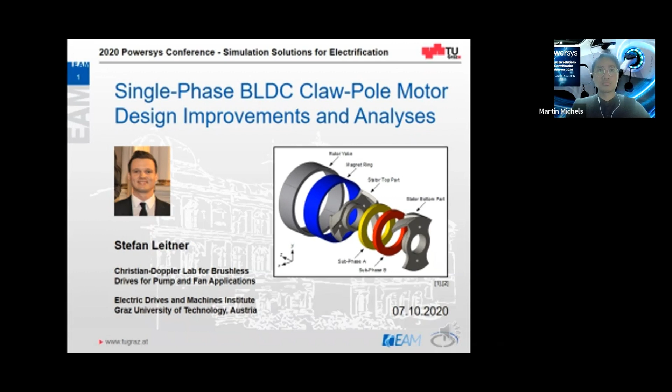One of the designs is actually shown here in this picture on the right. Well, I'm sure that at least some of you have already tried to slowly spin the shaft of a small PM motor by hand in the no-load condition. And what you feel is the cogging torque, which tries to restore the rotor to positions of minimum reluctance. Cogging torque can be a source of airborne and especially structure-borne noise in electric machines because, as it is superposed upon the alignment torque, it can trigger resonances of the drive system or adjacent structures. And today I will show you some interesting ways to reduce the cogging torque of small PM motors as opposed to conventional techniques with no increase to the manufacturing cost, which is super important for mass production.

So after a short introduction, I will walk you through 4 different brushless DC claw pole motor designs, namely air gap asymmetry, single-sided skew with auxiliary slots, and V-skew, which I will explain later in more detail. They have been investigated with JMAG and also verified by different experiments, notably with a rheometer shown on the right, to cope with the very small torques. Rheometers are typically used in the chemical industry to study the viscoelastic behavior of, for example, ketchup or toothpaste. Then I will explain the used rheometer-based measuring techniques.

I'm very sorry. It seems as the picture is not very clear. I will try to rerun the presentation. Just a minute. Yes, I think this is better.

Which are used to experimentally determine the cogging torque, the hysteresis torque, and the iron losses of the manufactured prototypes, as shown here. And lastly, I will conclude the main findings. Introduction.

Let's start with some background information. So when it comes to cars, there's two trends. Cars are becoming more and more quiet, especially when you think of electric vehicles, and the number of auxiliary drives is increasing, mostly for comfort and safety reasons. As a result, the noise of auxiliary drives is often unmasked, as shown in this picture, and can become disturbing. Hence, it is important to improve the noise behavior of these auxiliary drives. Currently, there's up to 100 small electric drives in a mid-size executive car, typical applications being illustrated in this picture. And one example I'm focusing on is the LED headlight fan for cooling and dehumidification.

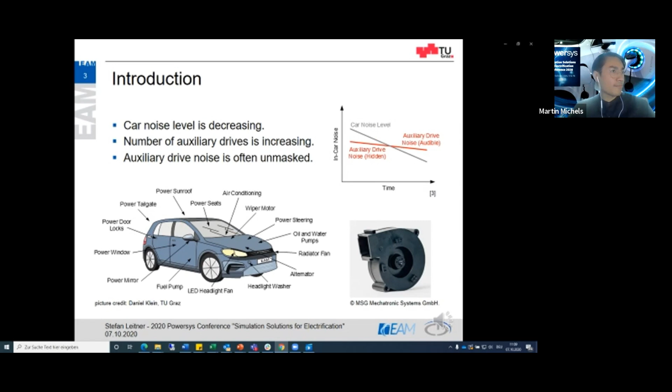So what's the motivation? Auxiliary drives are typically characterized by suboptimal motor behavior for cost reasons. That means they are often single-phase instead of three-phase systems, so they are characterized by fluctuating power and torque. And due to the very low number of stator slots, these motors typically have a very high cogging torque, which can be a source of airborne and especially structure-borne noise. But what is cogging torque actually? Put simply, cogging torque is a no-load torque caused by the permanent magnets on the rotor, which aim to align with the maximum amount of iron material, minimizing the reluctance.

So technically speaking, it occurs whenever magnetic co-energy changes with the rotor position. So the cogging torque is inherently offset-free. When the rotor is released from the shown position, the cogging torque will cause a counterclockwise rotation, trying to minimize the reluctance. A typical cogging torque waveform is shown in the picture on the right, with the cogging positions at 0, 90, 180 degrees, and so on.

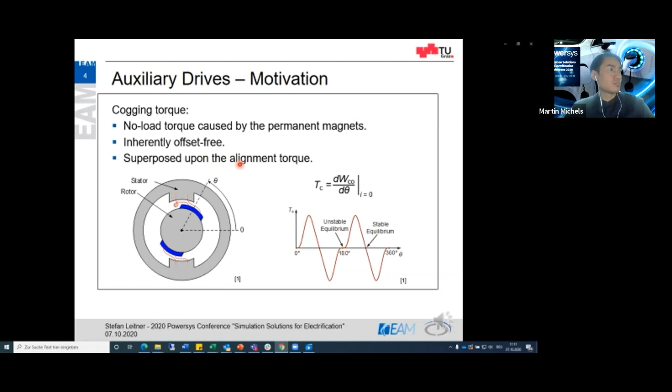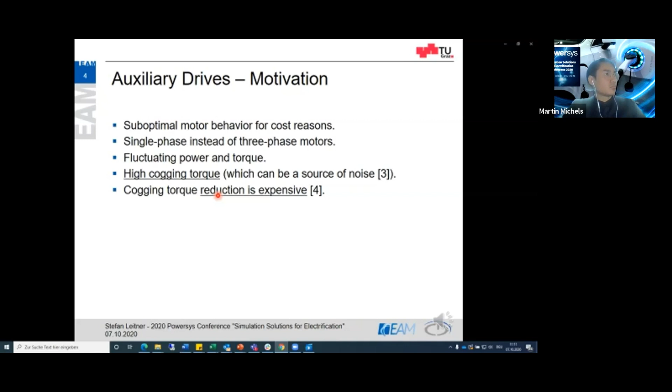But there are both stable and unstable points of equilibrium. And in the end, the cogging torque is always superposed upon the alignment torque, increasing the torque ripple. Unfortunately, cogging torque reduction is typically expensive as additional manufacturing steps are involved, which is often a disqualifier for mass production. So the target is to reduce the cogging torque with no increase to the manufacturing cost through proper design modifications. And even though it's hardly possible, it's still important to note that a complete cogging torque elimination in single-phase motors can be detrimental to the starting of the motor, but there are also different ways to deal with that.

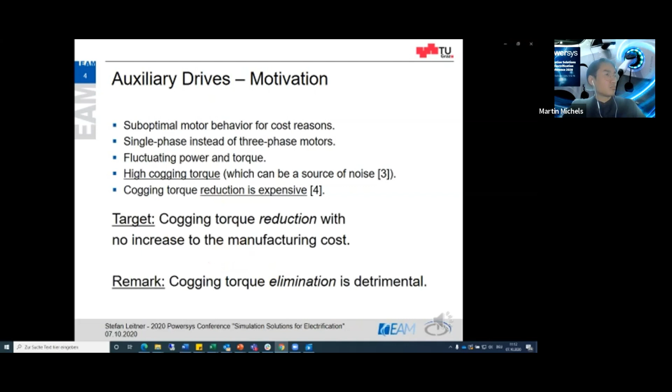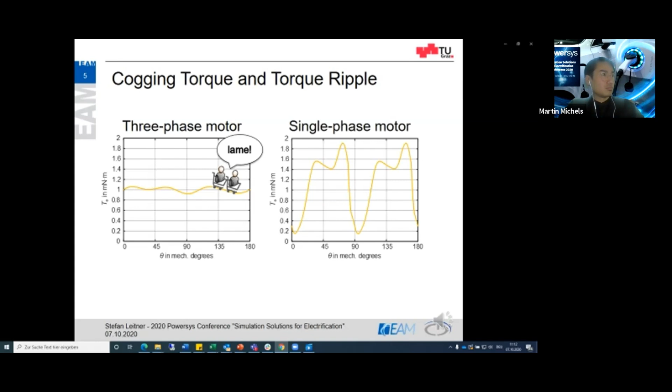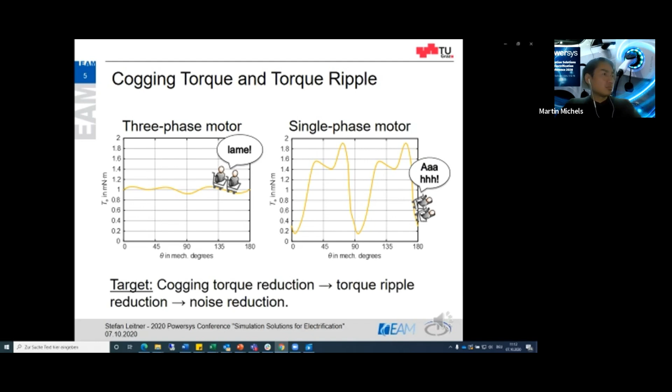On the other hand, single-phase machines are more like the crazy roller coaster in the amusement park of electric machines. Much more fun, but as you can see, they can sometimes be too noisy. And that's why my target is to mitigate the high harmonics of the roller coaster a little bit by reducing the cogging torque and torque ripple, and thereby potential noise. Let's move on with the studied motor topology.

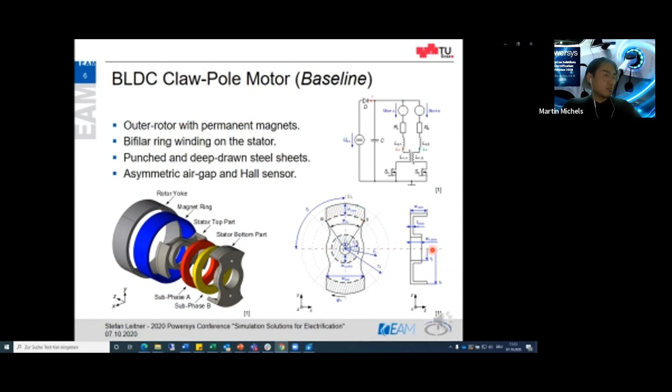Here we can see an exploded JMAG model of the baseline single-phase BLDC claw pole motor. It consists of an outer rotor with permanent magnets, actually a permanent magnet ring, and a bifilar ring winding housed between two specially shaped stator parts, which are punched and subsequently deep-drawn steel sheets. As the two sub-phases of the winding are wound simultaneously, they are very well coupled, as indicated in the electrical equivalent circuit on the right. An advantage is that in this case only two MOSFETs are necessary for phase current commutation, using the signal of one Hall sensor. And for startup, this motor can be implemented, for example, with an asymmetric air gap, the design of which will be discussed shortly.

Sorry, the video's not good anymore. I will do it again.

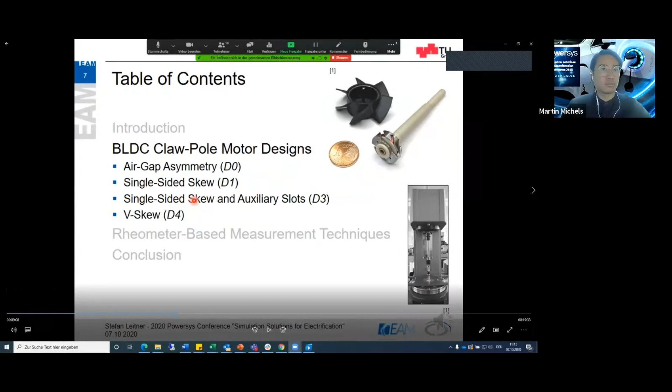So, different skewing measures. Design 4, with its V-skew, on the other hand, can reduce the cogging torque and at the same time balance the axial magnetic forces typically introduced by a single-sided skew. This effect is well known from skewed induction machines.

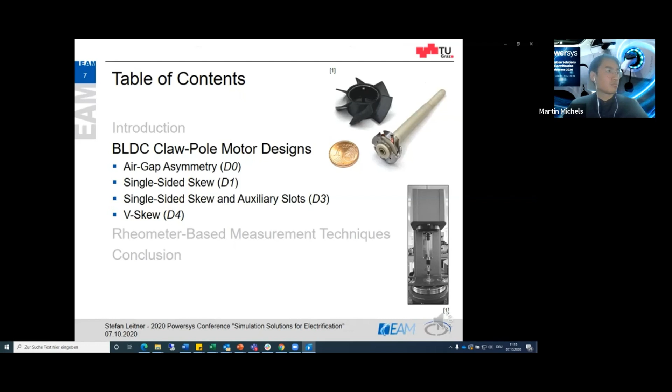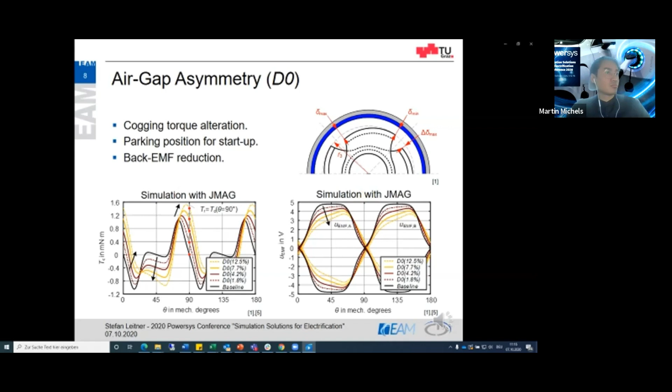However, increasing air gap asymmetry causes the effective air gap to increase as well, which causes the air gap flux density and, as a result, the back EMF to decrease. So from this point of view, the degree of asymmetry should be kept as low as possible.

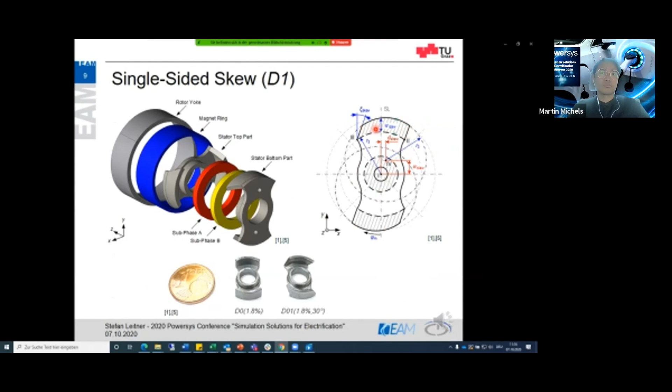Single-sided skew. So when you think of cogging torque reduction, what first comes to mind, of course, is skewing. But the big advantage of the claw pole motor topology is the fact that, thanks to the proposed punching layout, skewed stator claws can be implemented at the stage of punching the steel sheets at no increase to the manufacturing cost. So compared to conventional rotor or stator skewing, no additional manufacturing steps are necessary, which is a big plus. Now, implementing a skewing angle of 30 degrees can successfully reduce the...

Cogging torque is reduced by 23% in the simulations and by 28% in the measurements. As we will see on the next slide, a 30-degree skewing angle is chosen as a trade-off between maximum cogging torque reduction and minimum back EMF reduction. As can be seen, the simulation and measurement results agree

generally very well. One interesting aspect though is the circled plateau indicated in red. In the simulations, it appears at minus 0.2 millinewton meters, while in the measurements it is shifted down to about minus 0.4 millinewton meters. So it looks like the waveforms are simply offset. As discussed later on in the section about rheometer-based measurements, this can be attributed to the hysteresis torque phenomena, which was observed only in the measurements because a detailed hysteresis loop model was not available for the used iron materials.

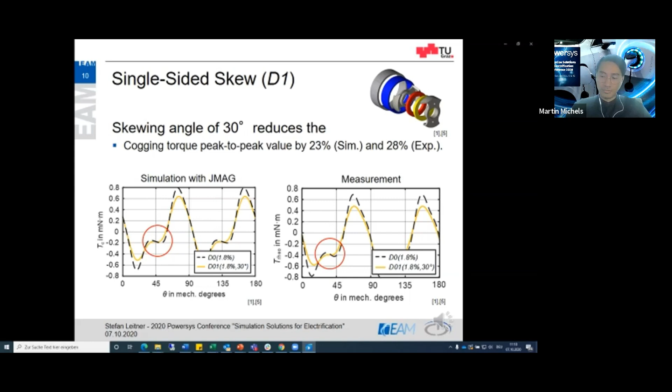So let's see what happens to the back EMF. The implemented single-sided skew of 30 degrees affects the back EMF only marginally. It is reduced by 1.7% in the simulations and by 1.9% in the experiments. As can be seen, the simulation and measurement results are in pretty good agreement.

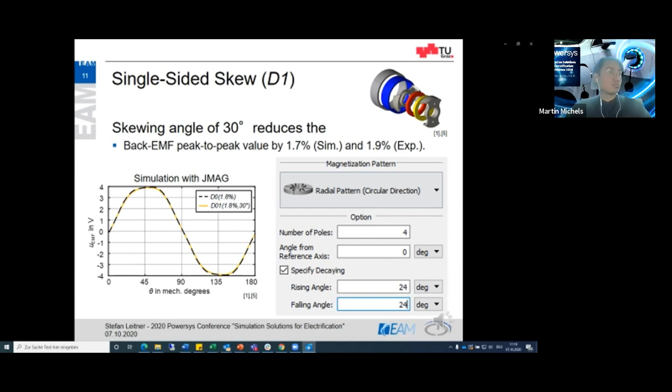At this point, I'd like to make a comment on the used JMAG settings. The ring magnet was modeled having a radial magnetization pattern with 4 poles. To consider the pole transition zone of the magnet, a decay was specified, as shown here, with rising and falling angles. So having performed the measurements, I had to play a little with this decay angle. In this rather simple modeling approach, the magnetization is assumed to be trapezoidal. But if you want to go for full accuracy, JMAG offers the use of customized magnetization patterns.

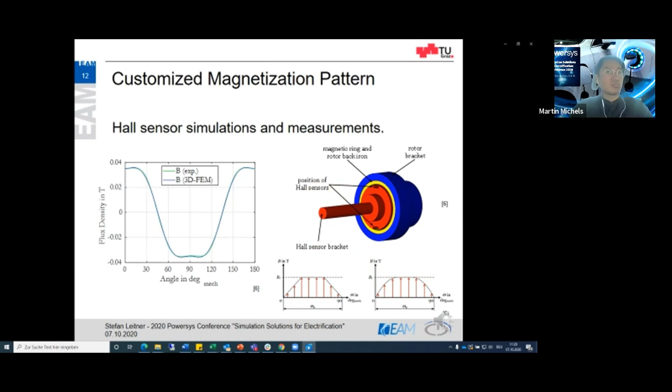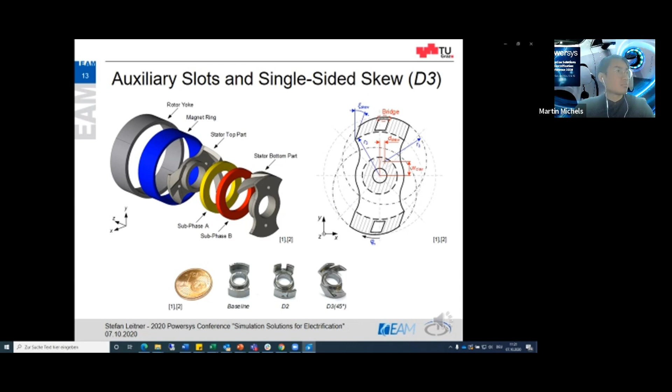Back to the different designs. In design 3, a single-sided skew is combined with auxiliary slots for cogging torque reduction. The introduction of auxiliary slots in design 2 can modulate the cogging torque, as discussed in more detail on the next slide, and thereby makes skewing much more effective in reducing the cogging torque. And again, this can be considered at the stage of punching basically for free. Let's take a closer look at how this works.

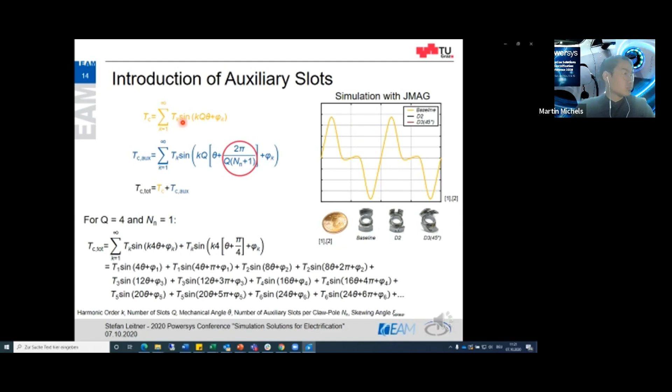Every cogging torque waveform can be described by a Fourier series without the zero component. Introducing auxiliary slots, an additional cogging torque waveform is created, which is phase shifted from the initial one. And these two are then superposed. For the 4 stator slots and 1 auxiliary slot per claw pole, this superposition looks like this. But as you can see here, if the auxiliary slots are identical with the actual slots, the odd order harmonic components cancel out due to a 180 degrees phase shift, while the even order harmonics add up. And the result is shown in the plot on the right, where the new cogging torque has double the frequency.

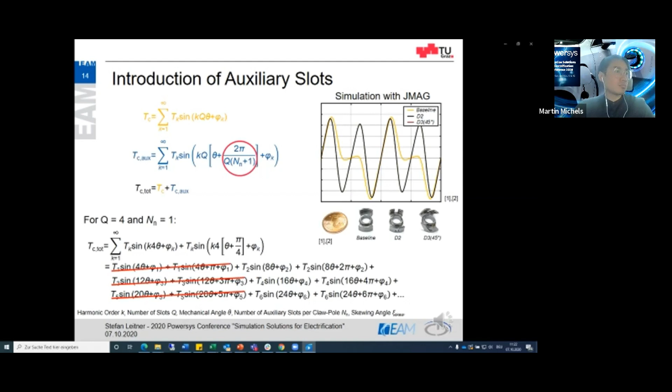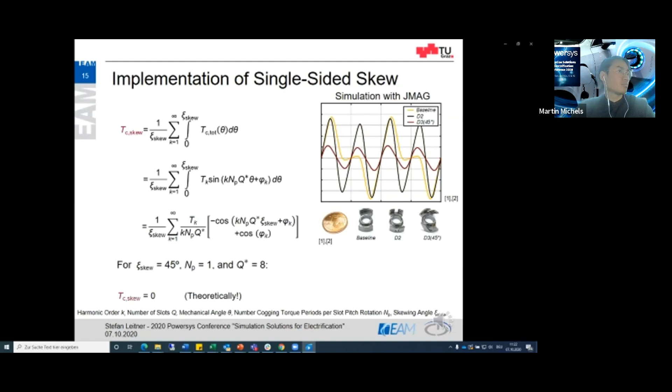Now, as a second step, a single-sided skew is applied to the stator claws, which acts as an averaging filter. Therefore, the black waveform can be described by a new Fourier series. And solving the integral yields this equation. And for a skewing angle of 45 degrees and a slot number of now 8, the cogging torque is theoretically 0. In the implemented model though, this is not really the case, but it's largely reduced, which we can discuss later on. But let's take a closer look at the analysis results.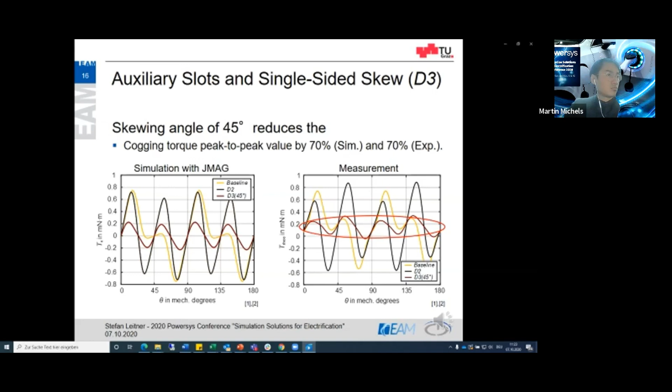So in the end, this cogging torque reduction results in a torque ripple reduction of 17%, as illustrated in the simulation results here of the output torque, comparing the yellow and the red waveforms. On the downside, in design 3, the back EMF is reduced by 12%, which eventually results in a reduction in the efficiency of 3 percentage points from 36% to 33%.

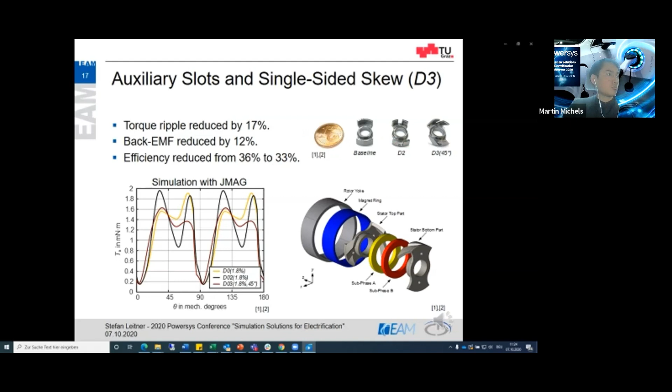In both cases, different input losses are dissipated in the winding, studying the steady state and transient overtemperatures of the winding for different ambient temperatures. From the steady state analysis, we can obtain the overall thermal resistance, and from the transient analysis, we can calculate the thermal capacitance based on the thermal time constant measured.

The determined equivalent thermal resistances are all around 40 Kelvin per watt. It can be concluded that the proposed cogging torque reduction measures do not cause excessive heating.

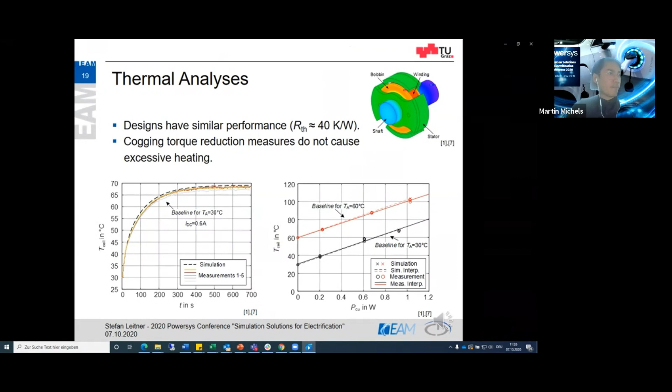Back to the motor designs. One disadvantage of the single-sided skew is the introduction of axial magnetic forces. As you can see from this equation, the axial forces are proportional to the tangential forces, and they in fact increase with increasing skewing angle. So for a skewing angle of 45 degrees, the axial forces are even equal to the tangential forces, because the tangent of 45 degrees is 1.

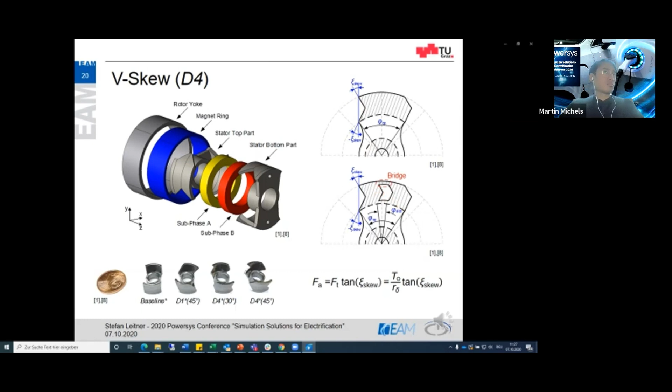In the end, the fluctuating output torque of this motor will cause fluctuating axial forces, which can also lead to noise. And to balance these axial forces and still reduce the cogging torque, the design 4 is implemented with a V-skew, where positive and negative skewing angles are realized halfway through the axial length of the motor. Again, all can be included in the punching layout. And if necessary, you can also include some auxiliary slots of the same shape.

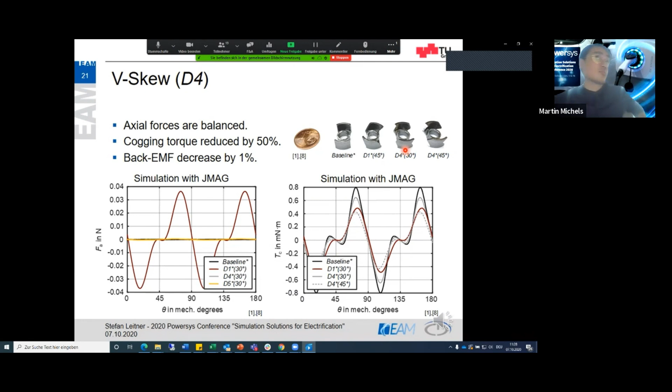This slide shows selected analysis results of design 4 with the V-skew in the no-load condition. Axial forces on the left and cogging torque on the right. Let's take a look at the axial forces first. Compared to the baseline, shown in black, the single-sided skew in design 1 introduces axial forces, as shown with the red waveform. But owing to the V-skew in design 4, these axial forces are balanced again.

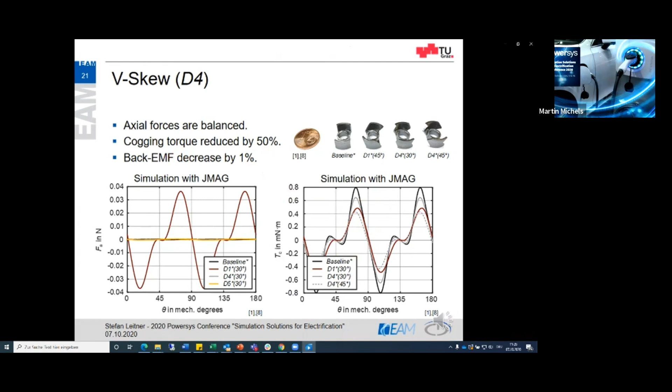On the right, we can see the cogging torque of these designs, and most importantly, for a V-skew of 45 degrees, see the dashed gray line, the cogging torque of the baseline in black can be successfully reduced by 50%, while the back EMF is only marginally reduced by 1%.

Rheometer-based measuring techniques. Measuring torques in the sub-millinewton meter range is challenging because especially friction can significantly affect the results. That is why I used a rheometer to determine the cogging torque, the hysteresis torque, and the iron losses of these small motors.

The test setup is shown on the left, in which a clamping element attaches the rotor cup to the rotating shaft of the rheometer, and the stator is mounted onto the stationary lower part. For the measurements, the rotor is pulled over the stator and then rotated by the rheometer, measuring the torque necessary to perform the rotation. The general motion equation of this setup is depicted below, including the torque components to be expected, namely acceleration torque, the torque measured by the rheometer, friction torque, cogging torque, hysteresis torque, and eddy current torque.

And by setting a constant rotational speed, the first term vanishes. And since the rheometer features radial and axial air bearings, and since there's no connection between the rotor and the stator, the friction term can be neglected as well. Performing the measurements at very low speed, for example 1 RPM, eddy current effects can be neglected as well. And this leaves us with this equation, which shows that the measured torque under these conditions is a superposition of the cogging torque and the hysteresis torque.

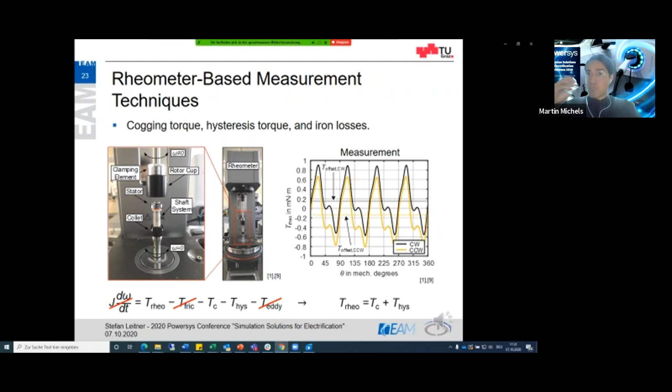And here we can see the no-load torque waveforms measured in the clockwise, black, and counterclockwise, yellow directions. Since the cogging torque is inherently offset-free, as we learned earlier, the observed offset is attributed to the hysteresis torque. So next I will show you how to separate them. Based on the previously determined torque waveforms for the clockwise and counterclockwise directions, the cogging torque shown in yellow can be determined by calculating pointwise the arithmetic average.

Similarly, the hysteresis torque can be determined by subtraction, according to this equation. It is shown in red for both measuring directions in the plot. As can be seen, the hysteresis torque is far from being constant. In fact, it strongly depends on the rotor position, and this is caused by the stator slots.

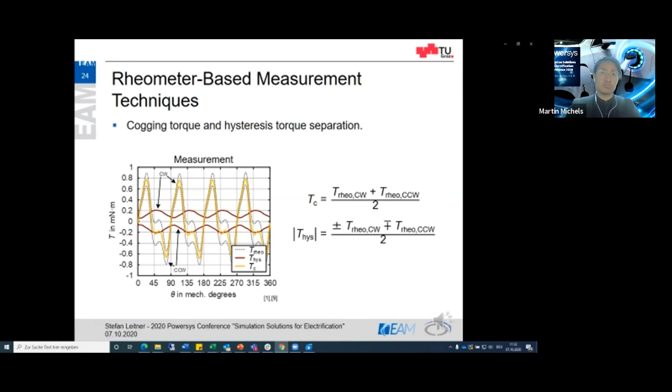The average hysteresis torque of this claw-pole motor is higher than a comparable brushless DC motor with a lamination stack, because the claw-pole motor is made from cheaper iron material with a relatively large hysteresis area. For comparison, the measured cogging torque is contrasted with the simulated cogging torque, showing excellent agreement. Now we see that the plateaus of the two waveforms actually match.

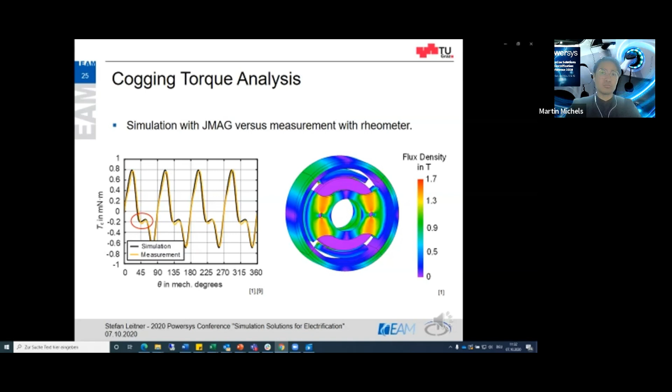So we've seen in the previous slides that there's an offset in the measured torque waveform, which is attributed to the hysteresis torque. Now, performing measurements at elevated speeds, it is observed that this offset increases linearly with increasing speed. But as the hysteresis torque is essentially speed invariant, this increase is solely due to eddy current effects. And by multiplying the measured offset torque by the angular frequency, the iron losses can be obtained and also separated, as shown on the right.

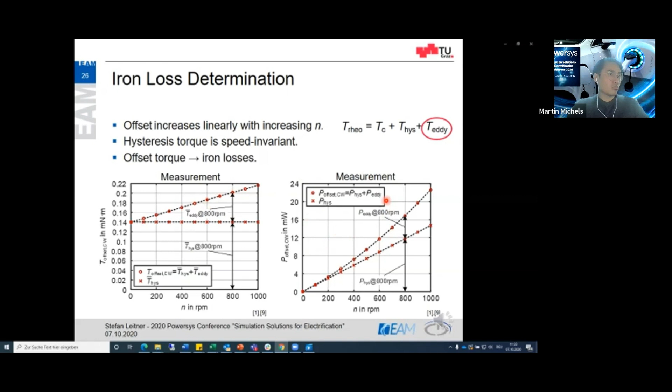An advantage is the fact that, as opposed to the investigation of sheet material properties, all manufacturing influences which typically alter the iron losses significantly are included in the measurements, as the assembled motor is studied. That brings me to the end of this presentation.

So I've mentioned that single-phase BLDC motors are characterized by high cogging torque and torque ripple, the harmonics of which can trigger system resonances and cause airborne or structure-borne noise. But unfortunately, cogging torque reduction is typically costly, so it involves additional manufacturing steps, which is often a disqualifier for mass production. However, in the proposed BLDC claw-pole motor designs, the cogging torque can be reduced and the axial forces can be balanced, both at no increase to the manufacturing cost, as the improvements can be considered at the stage of punching the steel sheets.

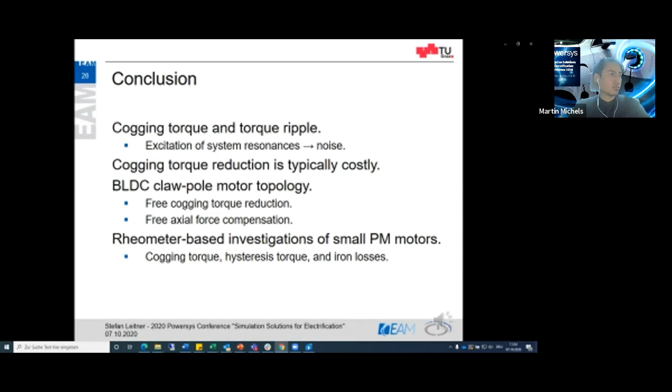So again, very sorry for the technical issues. It seems somehow Zoom was downgrading all the quality of the video. But here with me is Dr. Leitner. Also to you, very sorry. It was a very interesting presentation, and I will make sure that the presentation is online for rewatching. Yeah, sorry guys, next time I'm going to do it live for sure.